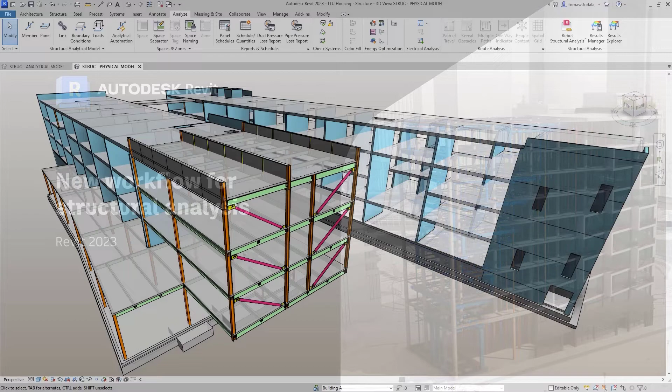The development of a structural analytical model is an essential step in a structural engineer's BIM process. This model is often used in collaborative workflows across engineering teams.

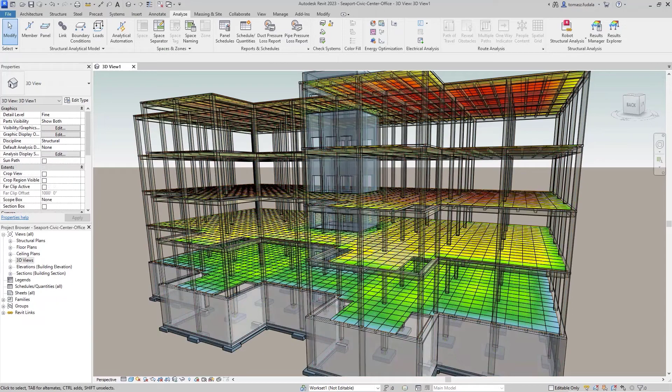For many years, Autodesk Revit has offered features for structural analytical modeling. However, structural engineers are looking for more flexibility and control over their analytical modeling process, particularly for complex structures, as this will enable fully bidirectional workflows between Revit and analysis software.

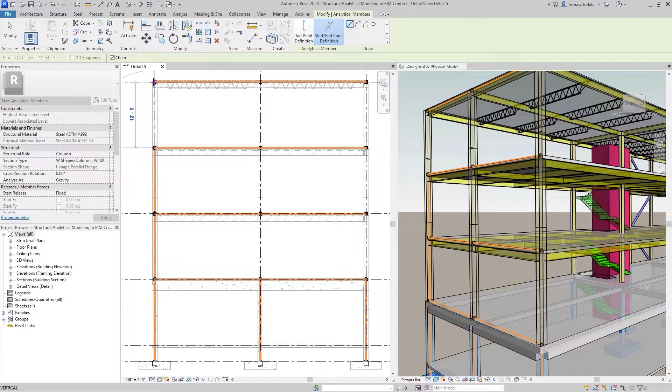To that end, Revit 2023 introduces a completely new approach to structural analytical modeling. As before, you can leverage existing physical geometry in 2D and 3D views as context for the analytical model. The analytical model remains associated to the physical geometry but is now independent, providing you with the benefits of speed and accuracy in model creation while protecting the analytical model from unexpected changes.

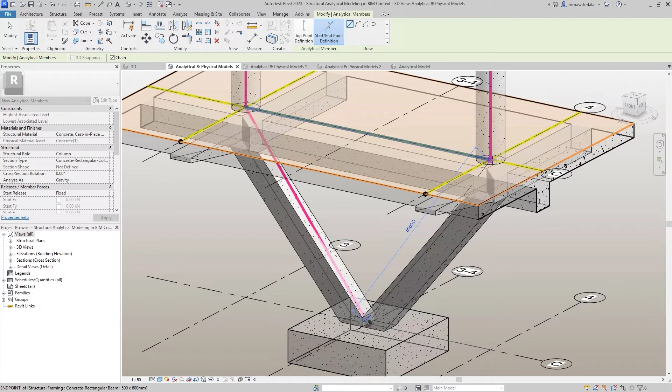When modeling analytical elements, you can now assign their structural role, type and profile shape, define their cross-section rotation, and specify how these elements should be analyzed.

To keep track of the relationships between physical and analytical model elements, you can easily associate them to each other. Once it's done, associated elements are highlighted upon selection.

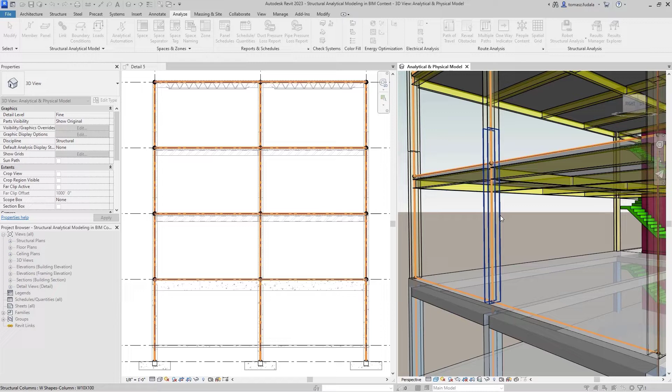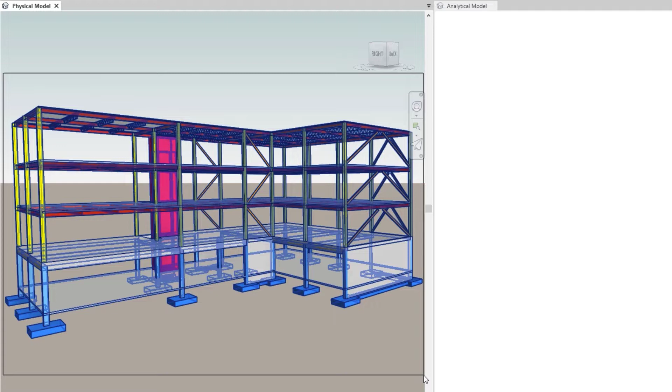Revit 2023 also introduces structural analytical model automation. This tool enables you to generate a structural analytical model automatically from selected physical geometry, and it offers many options for customization. This tool also ensures that the automatically created model remains consistent and connected, eliminating the need for tedious corrections.

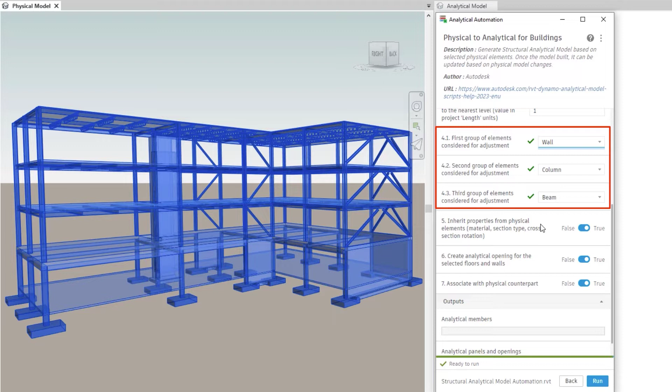You can define a first, second, and third priority element hierarchy. This is useful, for example, when prioritizing column locations over beam locations. First priority elements are the master elements, meaning that second and third priority elements will snap to them. Likewise, third priority elements will snap to first and second priority elements.

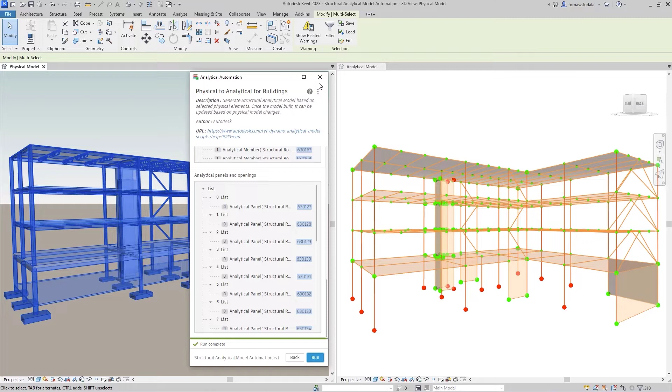You may specify a tolerance for the distance between analytical elements. You can decide whether or not the newly created analytical elements should be associated with their physical counterparts. You can also choose to have analytical elements inherit their properties from associated physical elements such as material, section type, and cross-section rotation. You can specify whether analytical openings should be created for selected floors and walls.

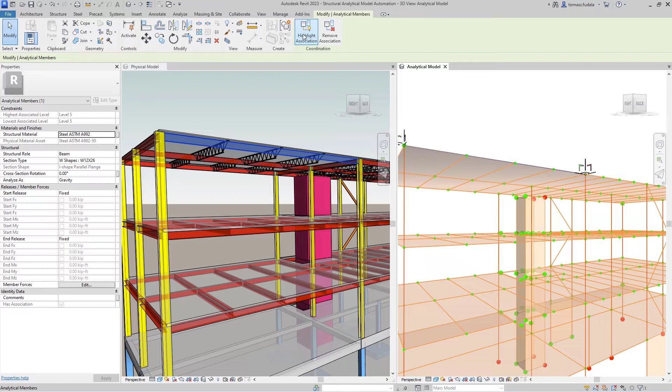Finally, once the analytical model has been generated, it can be updated easily based on physical model changes.

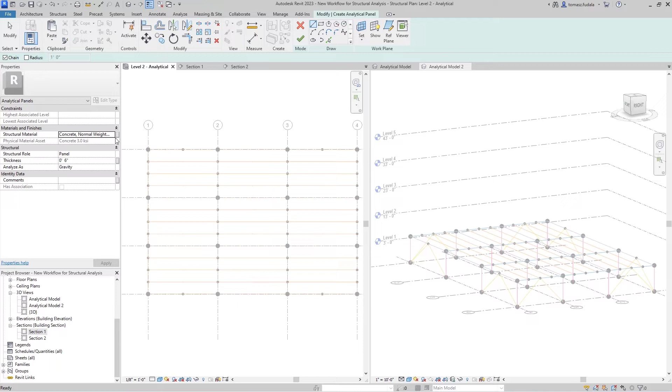As the analytical model is now completely autonomous, you can choose to initiate structural analysis workflows from Revit without any physical context. For example, when starting a project from scratch, you can focus exclusively on analytical modeling, just like you would in traditional analysis software.

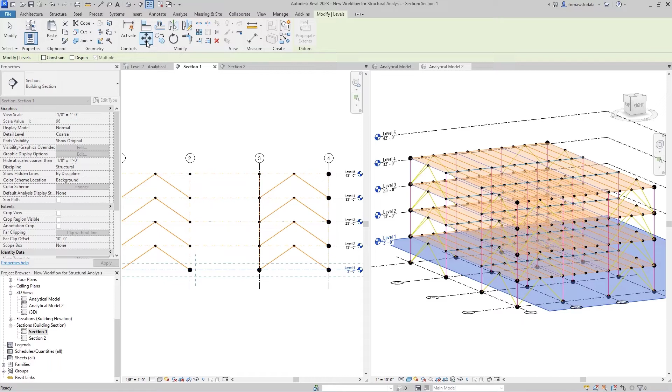In Revit, analytical elements are fully parametric and are associated with grids and levels, enabling you to control element positioning using these datums. This new approach to structural analytical modeling offers many benefits to structural engineers.

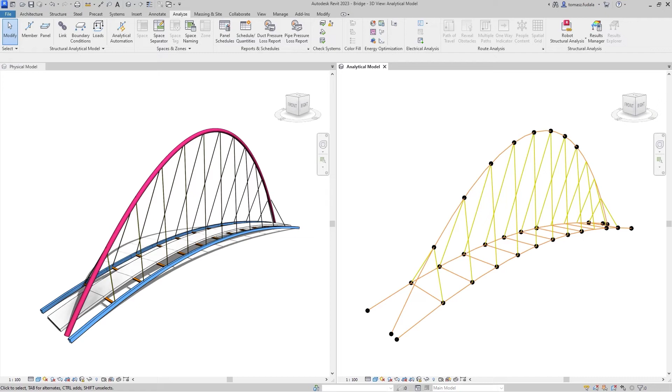They can more easily create representations for any type of structure: buildings, bridges, frames, pavilions, stairs, and more. They can create consistent analytical models that align with the preferred engineering approach. They can enable structure analysis jobs from Revit models. They can even create multiple analytical models for a single physical representation and consider various analysis approaches simultaneously.

In short, engineers will benefit from improved efficiency, accuracy, and flexibility in developing analytical models for their structures with Revit 2023.